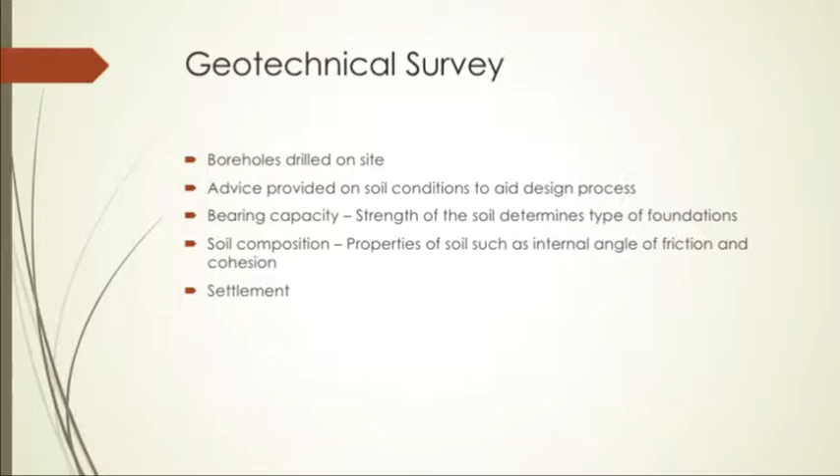The type of information you'll get from the geotechnical survey includes the bearing capacity, which is the strength of the soil and will determine the type of foundations, the soil composition with properties such as internal angle of friction and cohesion, and also understanding the settlement or displacement per unit of load taken from the load rundown.

For different soil types, we're going to have different foundations required. As the load gets higher and there's more load to be transferred to the ground, the footing requirements will increase. So with greater loads and bad soil, we're going to have piled foundations. With rock, which has high capacity, it will typically be a reinforced pad foundation. For gravel, which is non-cohesive and also high capacity, also pad. Same for sand, however if it's loosely compacted there will be risk of significant settlement.

Clay, under load, tends to consolidate - it drains the water and then takes in water, swelling as well. So clay is cohesive with a low bearing capacity and is very compressive under load. For clay, you'll have pad foundations for light loads, or piling for heavier loads. And when you've got silt with a high bearing capacity but not ideal, you'll need piled foundations.

So the pile, you might need to take it down from the top layer of soil all the way down till you get a solid layer. And as we'll get into soon, the capacity of the pile is determined by the friction and the bearing capacity at the bottom.

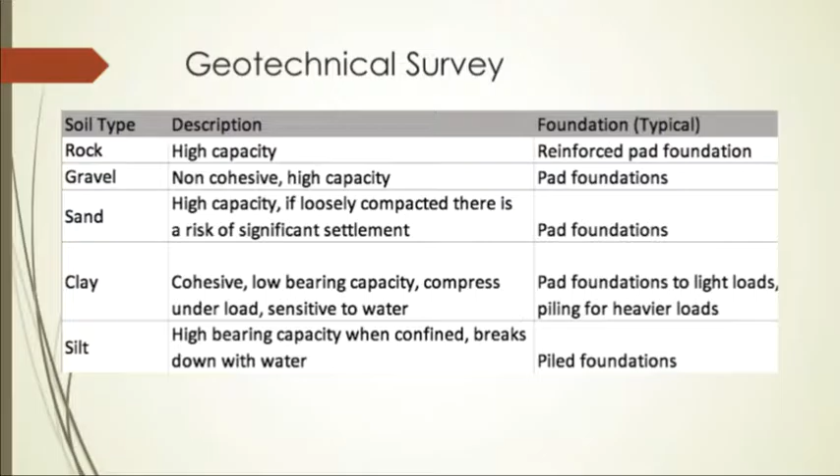Here we have the different footing types. First we have a mass concrete pad footing, which consists, as the name suggests, of massive concrete dug into the soil. We have mass concrete strip footing, which is again just concrete with the soil over it. Here we've got pile caps, so for greater loads, the load comes down here, and then you've got two piles on the edges, and a reinforced concrete strip footing.

Also a raft slab, which might be used for the slab on ground alternative - that's when the ground slab is being supported directly by the soil below.

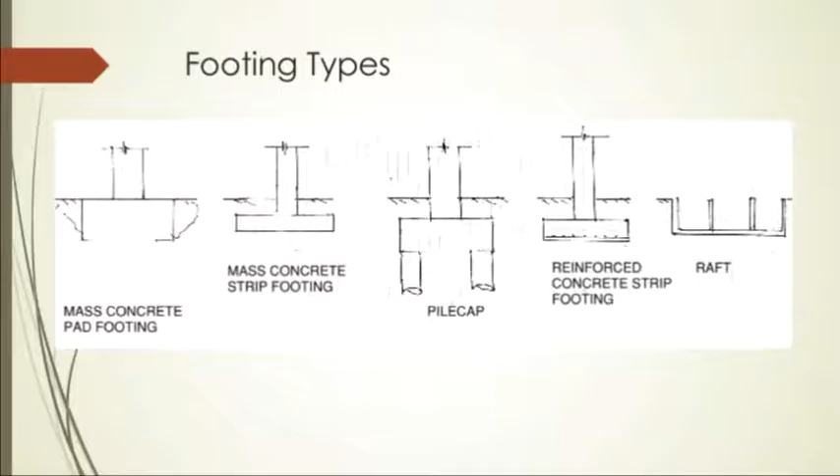Whenever we need to excavate soil, we need to have a system to hold the soil back. So on this side here, we've clearly excavated this soil, so we need something that is going to hold this back. That's what a retention system is.

What we're going to show today is a combination of soldier piles and shotcrete wall to hold a section of soil back. In this case, we're going to have a vertical cantilever, but sometimes you might be able to use anchors, which will subsequently hold the soil back and act like pin supports.

We will now go through some of the loading and setting up the problem to find out the maximum bending moments in order to design the piles.

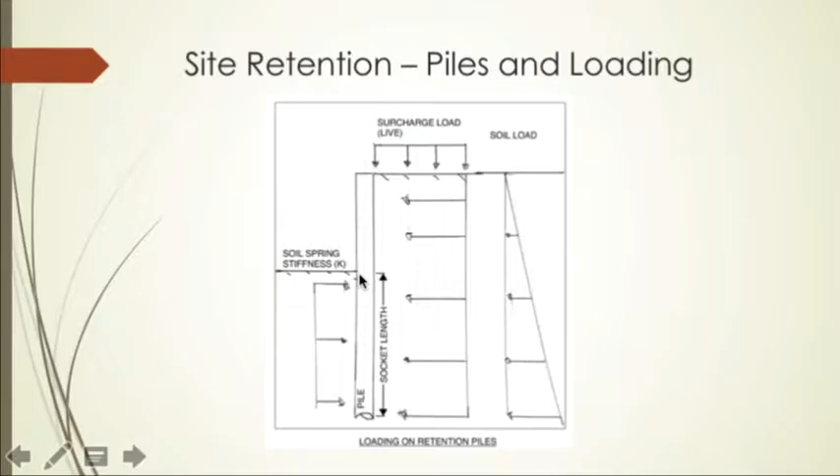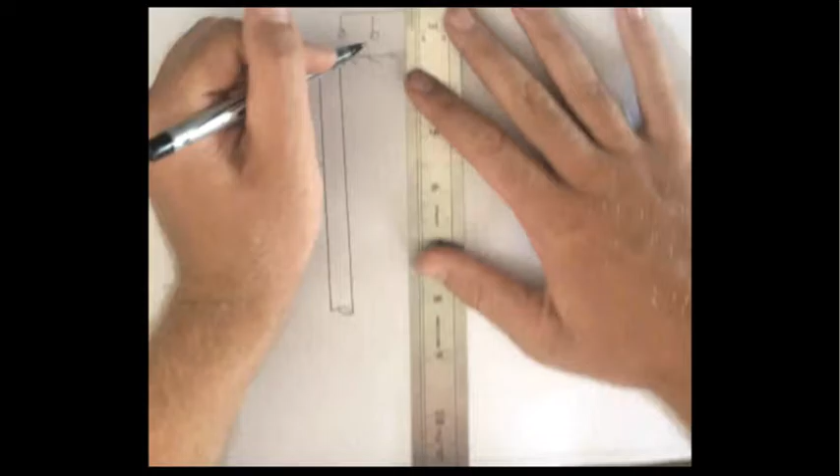So here we have a retention system. First of all, we'll go through the load. You're going to have a surcharge load, which will be governed by the traffic or the building adjacent. This load will be rectangular, going down like that. This will typically be, say for a busy road, something like 24 kPa, or 12 kPa for a not so busy road.

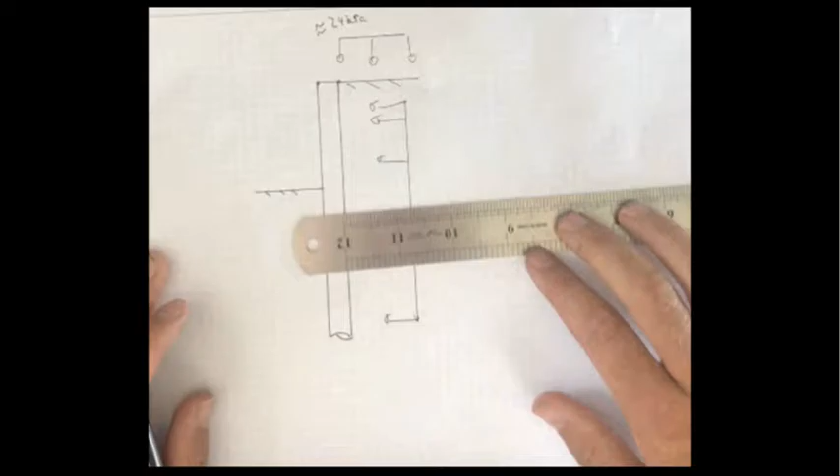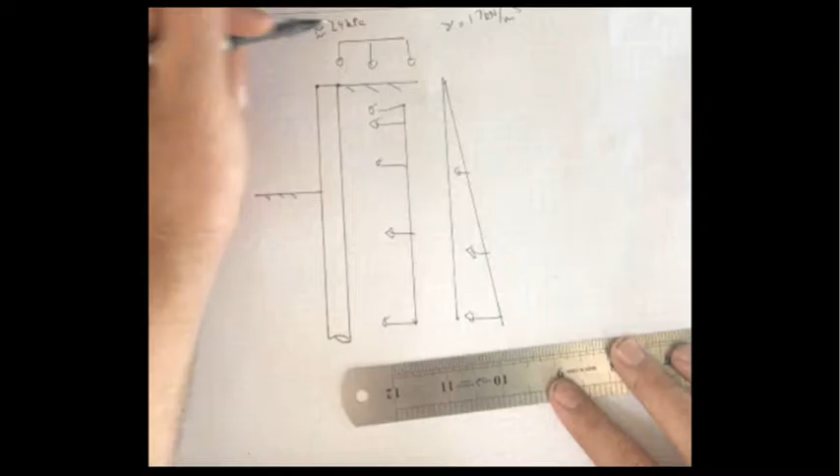Then also we're going to have the effect of the soil. You'll get advice from the geotechnical report for this case, but for a cantilever situation, you're going to have a linear load depending on the unit weight of the soil, which might be about 17 kilonewton per meter cubed. So that'll be the live load, and that'll be the dead load.

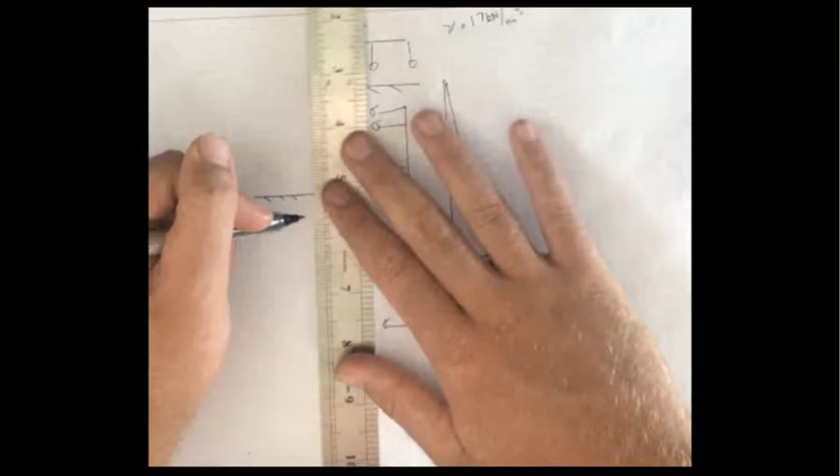If we use anchors in this situation, so if you have anchors coming through, this will actually be rectangular, but what we're showing here is the cantilever load case. And what we have supporting this load is the spring stiffness of the soil on this side, which has springs on this side as the soil goes down.

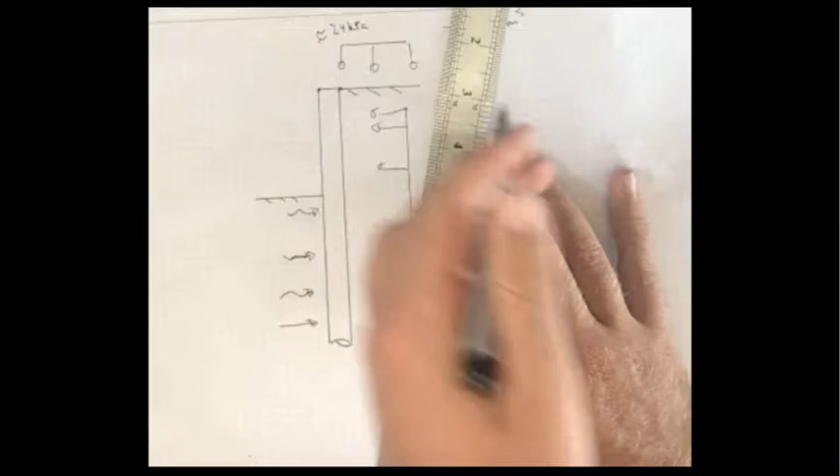That counteracts this, so depending on how good the soil is, you might require less socket length. So the first thing you need to do is find the socket length and find out how much depth of this you need.

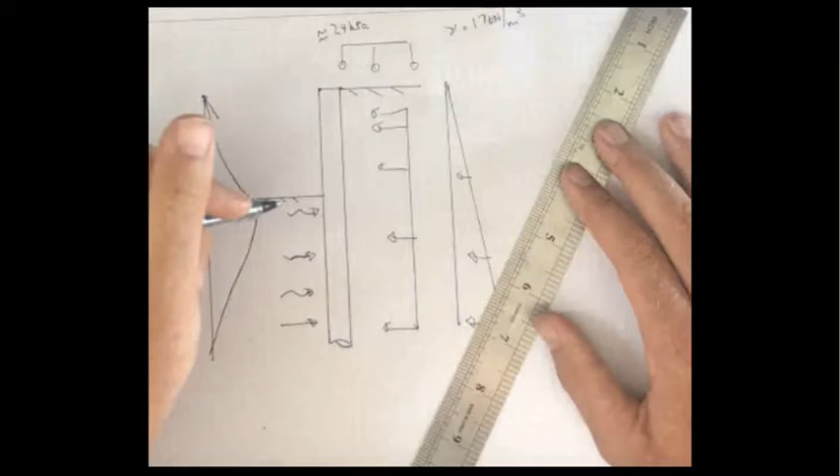Also work out the bending moments based on this load. The bending moment diagram is quite easy to figure out. For the cantilever section, you'll have something like beginning like this, coming out like that, and then we start getting the support from these springs. So M star, the maximum moment, will be something like here, and that's what we need to design our piles for.

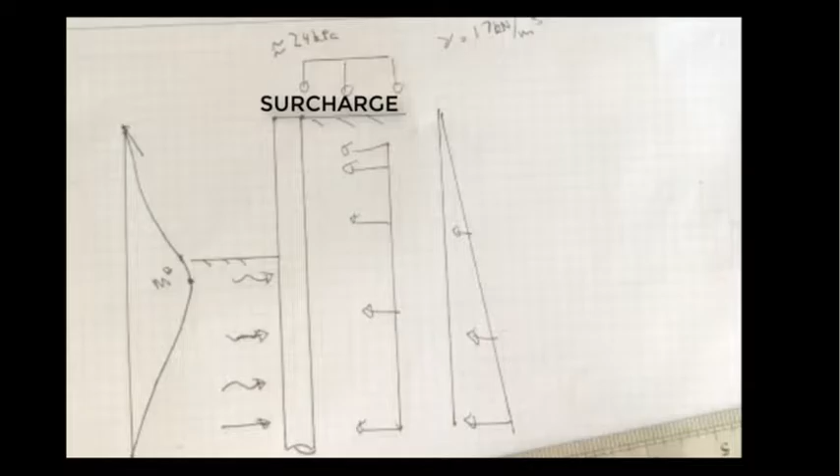In summary, what we have here is loading from the surrounding vehicles or buildings, such as the surcharge load, rectangular, plus the dead load, which is the unit weight of the soil. This is supported by the lateral spring stiffness, which is different for each type of soil, and also we have the socket length, which is a function of the cohesion and the friction angle of the soil.

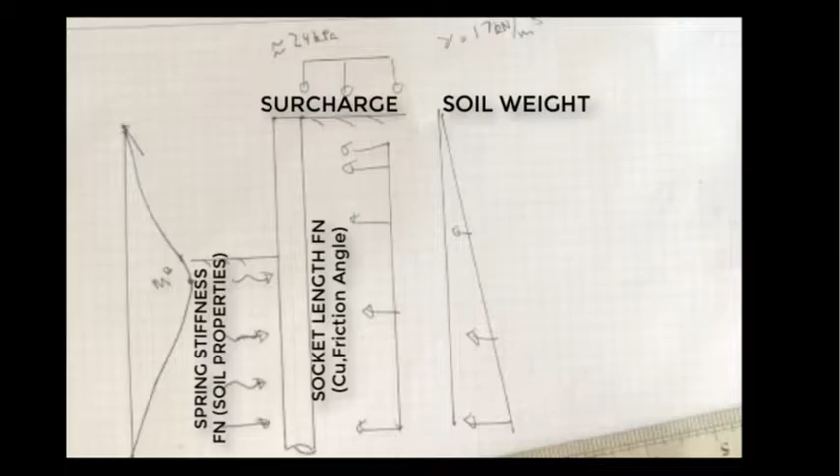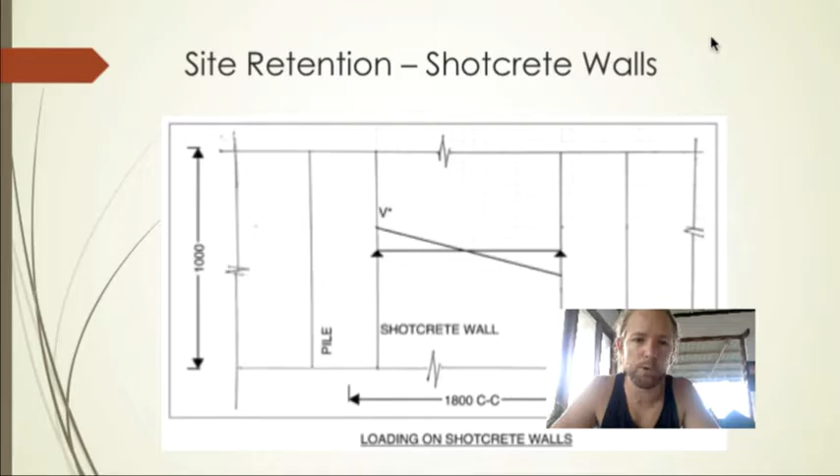So in order to design this, the geotechnical investigation is required. Once we have designed the piles, we need to check the shotcrete walls. The piles need to be designed for the bending moment and the deflection, like you would a normal column really, but for that bending moment and shear force.

The shotcrete walls, however, span in between the piles for the same loading. So take a 1 meter load strip and then you can design it like a 1 meter slab spanning between each pile, and design this for shear.

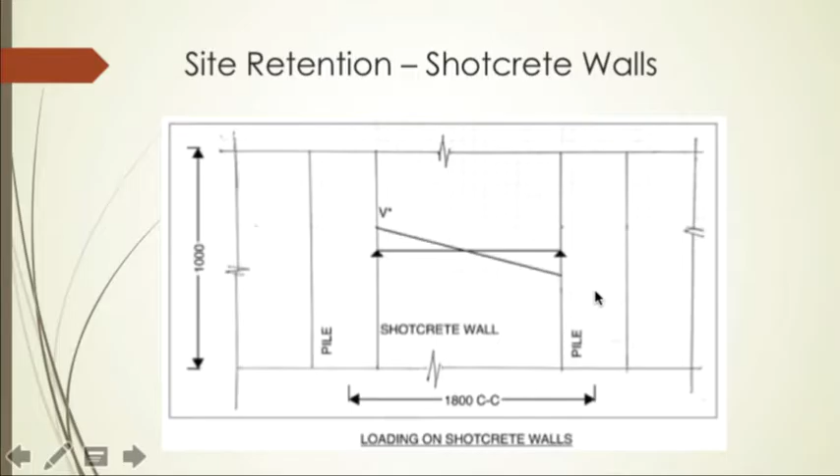Once our loads start to get a bit higher, the piling requirements significantly increase. The purpose of the piles is to transfer the loads from the weak soil layer to the solid soil layer. So there are two types of strength that the piles can get from the soil.

First of all, it can be friction from the soil, the way the pile goes up against the friction, and also the end bearing. If it's in a good soil layer, you might get some end bearing strength. So for some soils, you might get one or the other, but for the greater loads, you might need both.

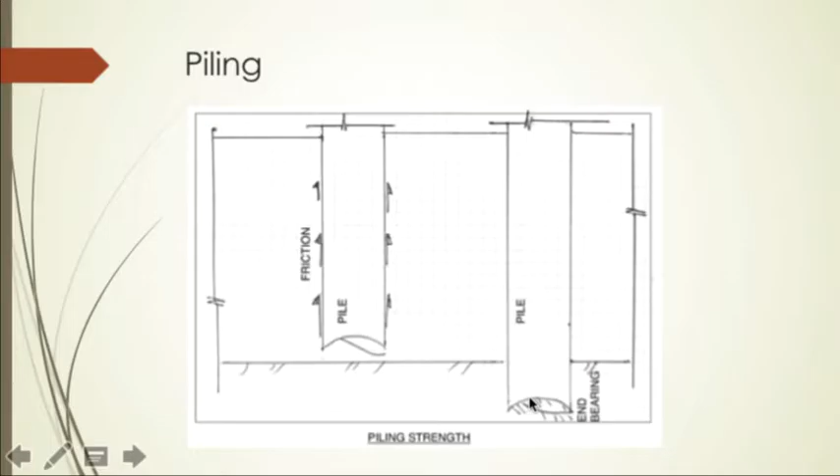Basically, the bearing capacity plus the friction capacity must exceed the value from the load rundown, or in the case of lateral stability where you might have uplift, it must also be able to handle the tensile loads placed upon it.

So there we go guys, part 6 all done, our final part of the short course. What we've covered is the soil or site investigation and the outcomes of it. Also a retention system, so we have an example of a shotcrete wall and pile combination that is cantilevering out of the soil, and the type of loads that are going on in this load case.

Also, what we covered is piles and how piles derive their capacity and the different types of foundation solutions.